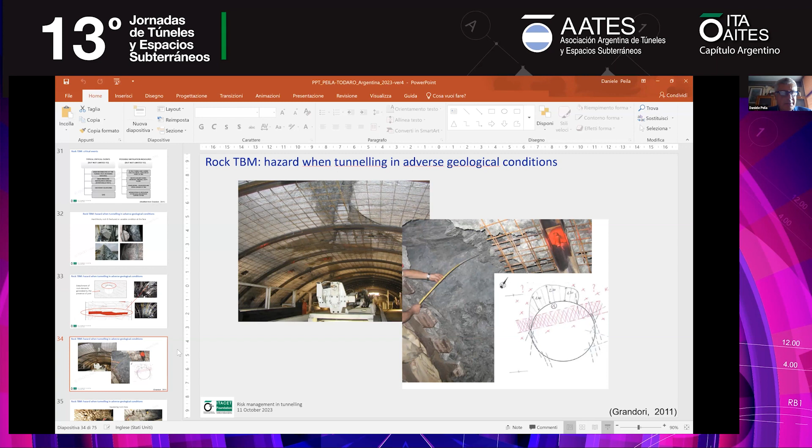Here we are, okay. I will lead the presentation, and then I will ask Carmine to say something, but I think that due to the time schedule, I will try to manage mainly the presentation.

I was asked to deliver a presentation collecting the main hazards that can be found when tunneling, in conventional and/or mechanized tunneling. This was the task that Michel Deffayet asked us to manage for this short course, and I tried to fit it into this schedule.

Starting with the presentation, I think it's important to have a clear overview of why understanding the risk of tunneling is so important. I think all people who work in tunneling engineering, when they approach design, do this, what I am telling you, and I will explain in a second. But sometimes this is not structurally organized.

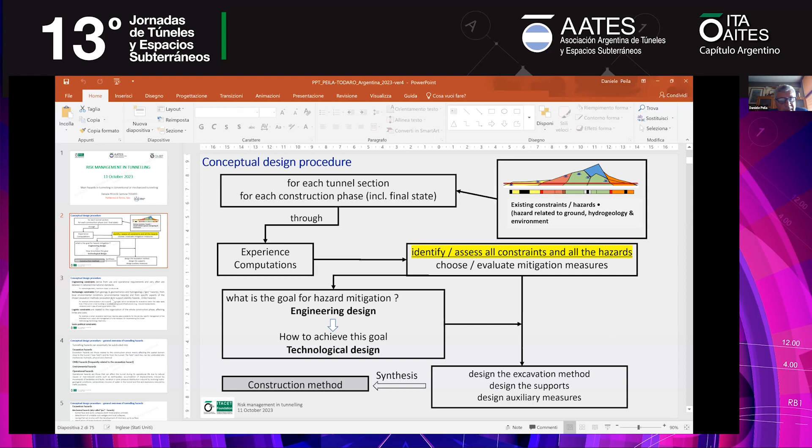Now, after this general scheme that I will try to explain better with an example, I will answer the question Michel asked me to discuss: what are the main constraints we face in conceptual design practice. There are engineering constraints that derive from use and operational requirements, often detailed and linked to national or international standards.

For example, the geometry of the tunnel related to its use, the maximum slope, and the curvature you can accept if you are in a road or a railway, including high-speed railway.

Then you have technological constraints that derive from the geology, geomechanics of the soil, and the hydrogeology of the underground water. I will give you some examples very soon. These can be globally called geo-constraints, linked to geology and geomechanical hazards.

Then there are environmental hazards that are constraints depending on local environmental conditions. There are also specific hazards related to the excavation method, excavation and support stability hazards, and operational health and safety, which are frequently underestimated or not considered in this process, but in my opinion are a key point to take into account.

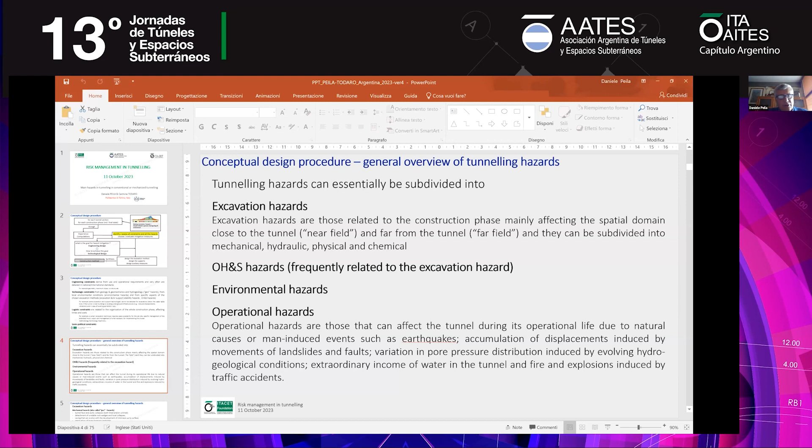I will not talk about operational hazards, which occur during the operation of the tunnel. In Italy right now this is becoming more and more important, related to the maintenance of tunnels and the movement that can occur in concrete linings, which can affect the safety of roads. But this is out of scope, so operational hazards are out of my presentation.

When we go to mechanical hazards, the geohazards, we can have tunnel face and cavity collapses, both lined or unlined, detachment of unstable rock wedges and potential local collapses, caving that can evolve with development of a chimney up to the surface, and reactivation of large dormant landslides.

Slope stability at the portals, rockfall, avalanches. Sometimes this aspect of slope and surface stability isn't considered part of tunnel design, but unfortunately in many big projects, the risk of rockfall and large landslides can affect job sites and tunnel entrances, and can require specific design. As tunnel engineers, our knowledge frequently isn't deep enough or doesn't give enough attention to this topic.

You can have unacceptable tunnel cavity displacement in squeezing ground. You can have karst—an example of karst was shown in the presentation before this session. Rock burst is a typical problem of very deep tunnels, like in the Alps or in the Andean zone, for example in Argentina.

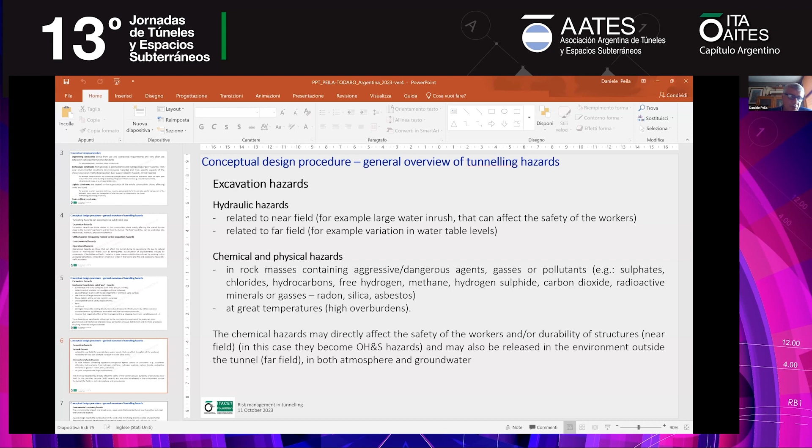This is also part of the environmental constraint, but the environmental constraints are also linked to architectural and landscape considerations, because now in Italy we are designing new highway tunnels and infrastructure closer to Genoa, in a very urbanized area, where landscaping conditions can be important. But water and air issues towards the population are again important - dust and the presence of ground contamination.

If you have to excavate a tunnel through a zone where there was historically some industrial infrastructure that could have polluted the soil - then there is the natural impact on biotopes, which can be very critical in mountainside areas, and correct natural resource management is also today, with the concept of sustainability of underground and global construction, becoming more and more important.

So this very wide overview leads to this slide. Due to all the risk and constraints, all the hazards that can lead to risk, a risk management approach should be developed. So when the risk level due to the hazard is not acceptable, you need to design a proper mitigation measure. And this is the key issue of the design.

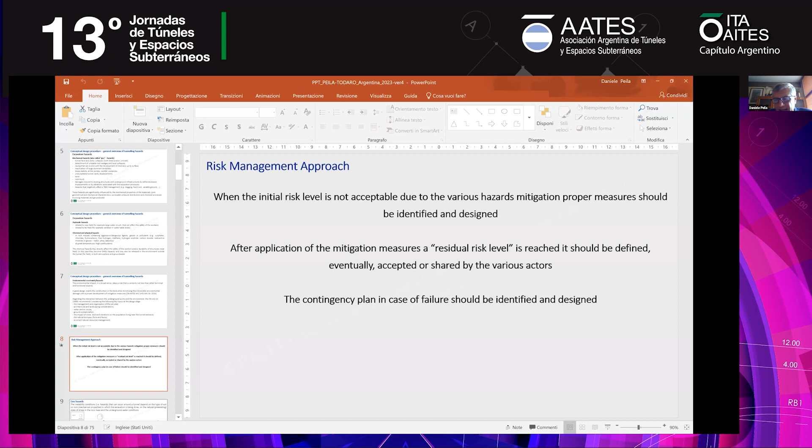So just to summarize the key concept of geohazard: the instability condition that can occur around the tunnel depends on the type of soil and rock, their mechanical properties in which the excavation is done, and the natural pre-existing state of stress. So it's not only the properties of the rock, but also the state of the stress.

It's clear that all these phenomena that can occur around the boundary of the tunnel can impact both the local stability, the safety of the worker, and the lining stability. In the case of boundary displacement, this can also affect surface stability.

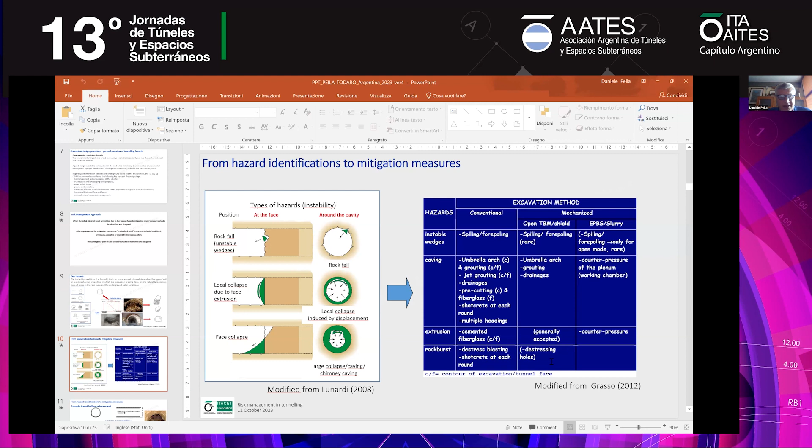Going back to a slide frequently shown in ITA presentations, taken from a presentation by Grasso some years ago but still active, you see that once you identify the hazard, you go to the choice of excavation method, conventional or mechanized, and the mitigation measure. I don't want to go into detail, just to show a general approach: from hazard, you go to mitigation measures. For example, we want to excavate a tunnel full face.

It's clear we are changing the situation, and there are new stability hazards that can occur. One example is instability of the footing of the steel arches. So you have a new engineering design: evaluate the type of footings and underpinning, and the technology is which type of foundation for the steel arch you will use. Also, you must take into account new operational health and safety issues, since there are more interfering workplaces, which increases the risk for the worker.

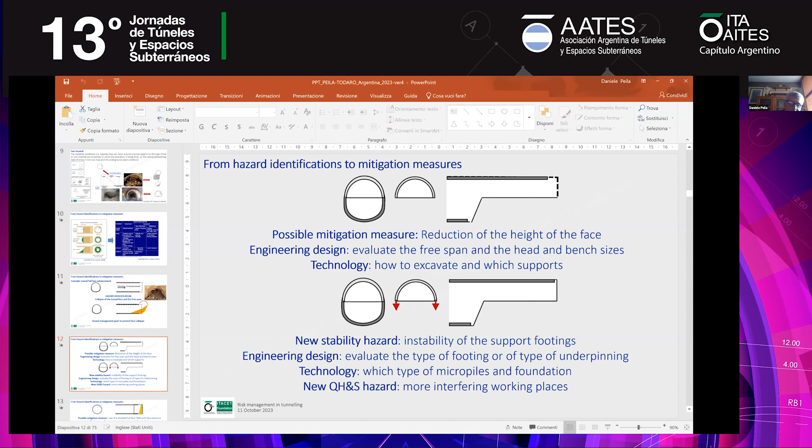Another choice, a possible mitigation measure, is to use a shielded full-face machine able to apply face pressure, which will prevent the collapse. So you have to evaluate the pressure to be applied. The technological choice, as I explained in my first slide, is to choose the proper type of machine.

Again, when you make a choice, you create a new hazard. For example, the new stability hazard is how to properly manage the face pressure with the machine. And the new technological hazard, if working with an EPB machine, is the management of the soil conditioning—should I choose the proper management of the soil conditioning? I have some slides discussing this concept.

There's also a new environmental hazard that depends on this technological choice: how should I dispose of the muck, for example, with the machine.

Another possibility, with the same type of hazard regarding management of the face, is to use auxiliary methods: drainage, pre-supports, jet grouting, permeation grouting, ground freezing, soil reinforcement. So I create a new type of material, press supported, and these can be done from the surface, from a nearby underground structure, or from the face. Again, the engineering design is to design this improvement—from where and to what extent—and the technology is the technology of this intervention.

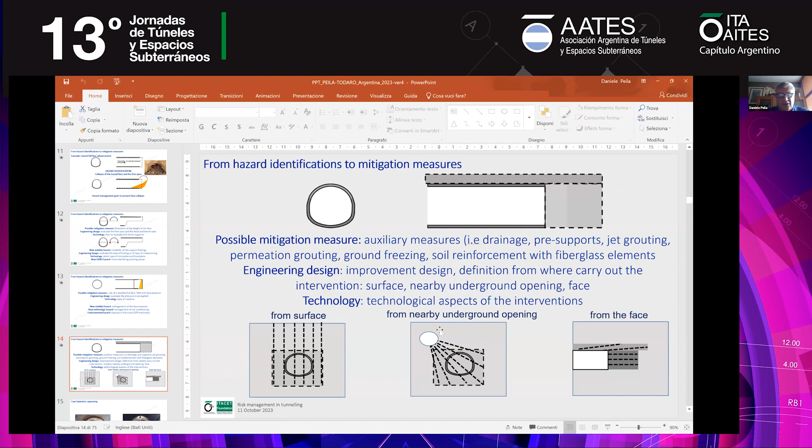For example, if I'm working in a tunnel where we're injecting sand that can't be injected everywhere, instead of permeation grouting you can use jet grouting or another method. But the concept I want to highlight in these methodological slides is that the engineering design is different from the technological design. I have collected some examples here.

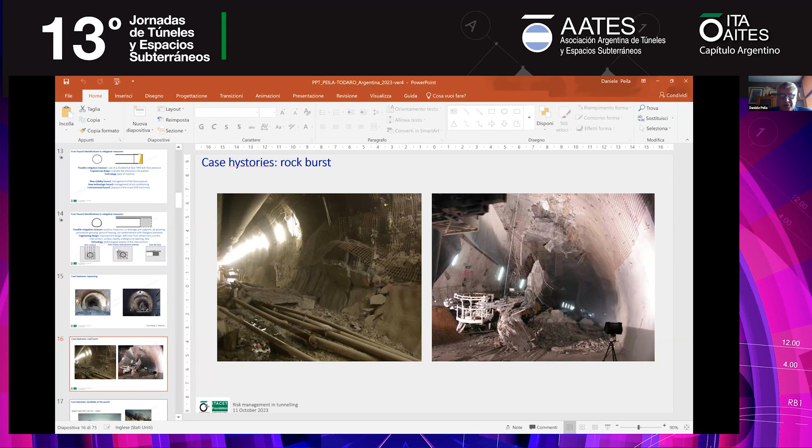But also some examples of what I was trying to explain: the risk of interference between surface instability and the tunnel.

This was a very old picture given by my mentor, Professor Pelizza, many years ago. It's a very old picture, but for me it's very pedagogical, showing the slide collapse that affected the portal entrance during construction. There was not a proper evaluation of the stability.

This is another example, sometimes underestimated in tunnel design, where you have a cliff. Here you see the cross section and the detachment of potential blocks that can affect a tunnel portal. The risk here is during construction, but also during the exercise of the tunnel. Here you see all the design we carried out with the wire mesh, like that one.

This is the numerical model of a mesh we carried out, and here you have the study of the proper positioning of the mesh to protect the exit of the tunnel, but also to protect the worker creating this artificial tunnel for the safety of traffic. So you have two concepts we take into account.

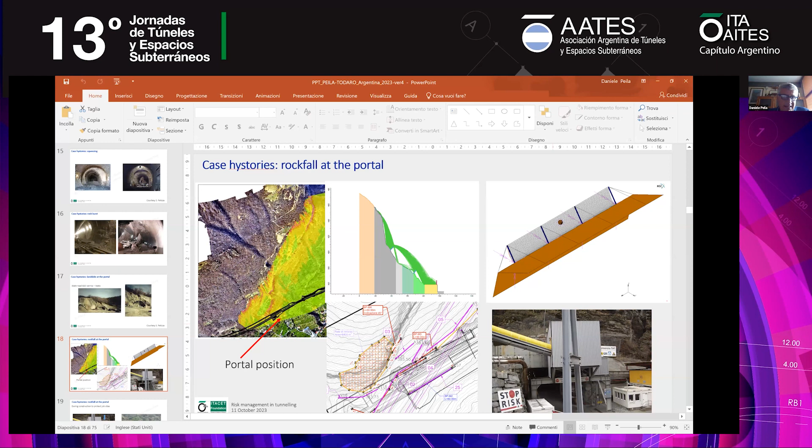In this picture you see the protection of the entrance of the tunnels, also with the wire mesh. Here you see the cliff, but this is another example of the protection of the job site due to the rockfall condition. So you have to protect our workers like that.

Water - here you have the example of a very heavy water income. Here you have an example of a sinkhole that was created during the excavation of the tunnel due to not proper face management. This was an excavation with an EPB, but the concept is that there was not proper face control, and you have a sinkhole reaching the surface.

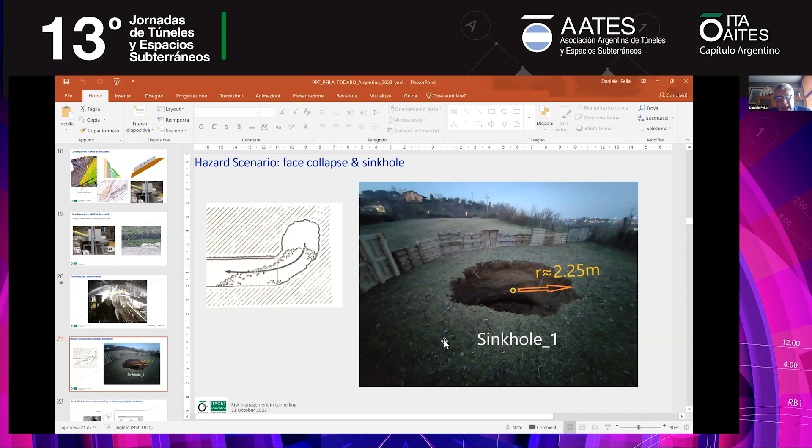When we think of hazard, it's also the stability and detachment of wedges due to the presence of joints. This is a typical picture of the geometry of the hazard, but this is an interesting example where you see that this tunnel was excavated originally with this size, with no large problem of stability. But when there was the enlargement of the excavation here for the parking zone along the tunnel...

...due to the exercise, the joints that occurred created a very wide possibility of detachment, and there was this collapse that was not occurring along the tunnel. The geometry of the joints was more or less the same, but it was the enlargement of the tunnel. Again, these slides were given to me by Professor Pelizza.

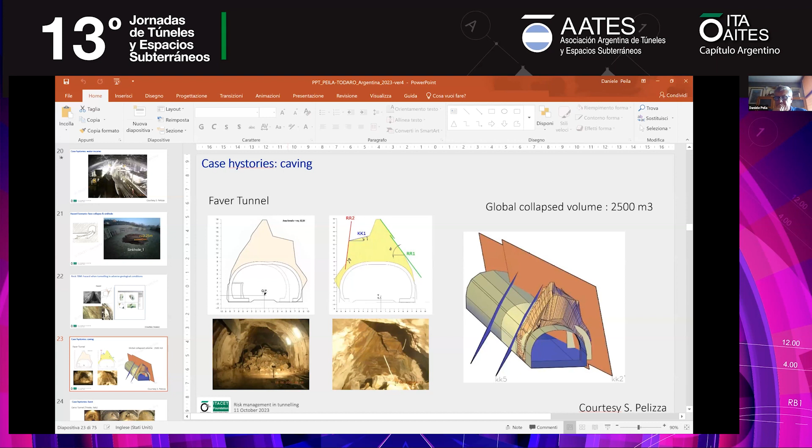I don't want to enter into the karst problem that was already discussed, but also the sudden rush of water that can completely flood the tunnel. This is an extreme example.

I want to give your attention to this example, the tunnel in Catania, in the metro of Catania, where you see the complexity and many hazards that can affect this excavation, because you have here a strong basalt due to a lava flow that was coming from the volcano, and here you have the sand that was deposited above the lava flow.

But the stability of these elements is completely different and requires different approaches to different hazards. But globally, they describe the hazard of this face, of this problem.

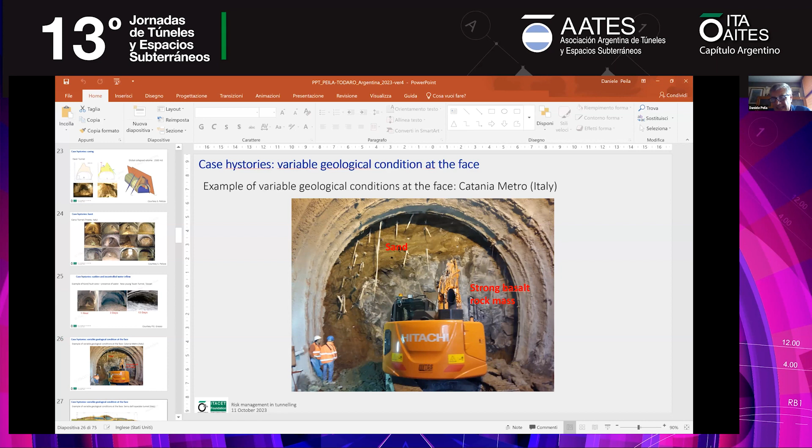This is another example in the south of Italy, where you have different layers of sand and clay, and these different types of layers present different hazards, because the clay is stable and the sand is not, so this slab of clay can detach or collapse. In this condition, there was a fatality that occurred.

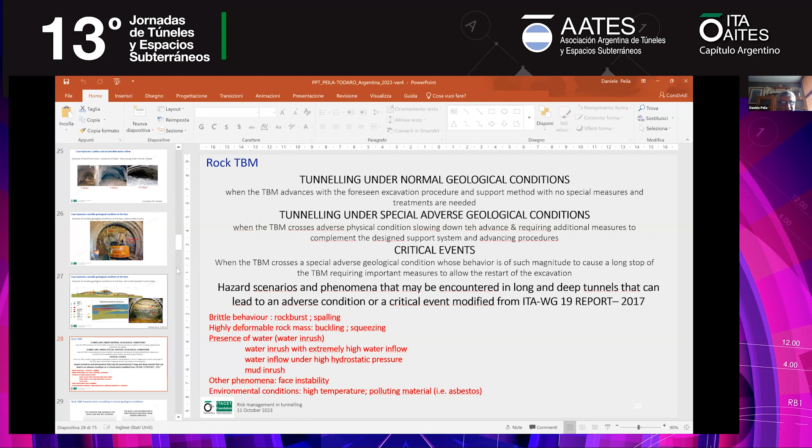Then there are the critical events that will block the machine and require important measures to allow the restart of the excavation. The hazard scenarios and phenomena that can be encountered in long and deep tunnels, leading to adverse conditions and critical events, you can find in an ITA Working Group 19 report, which is quite comprehensive and quite wide. These are all the schemes I have added in my presentation, and I will skip all of them, but you can find all these slides there.

Here, to show you some examples of critical cases, since I'm running out of time.

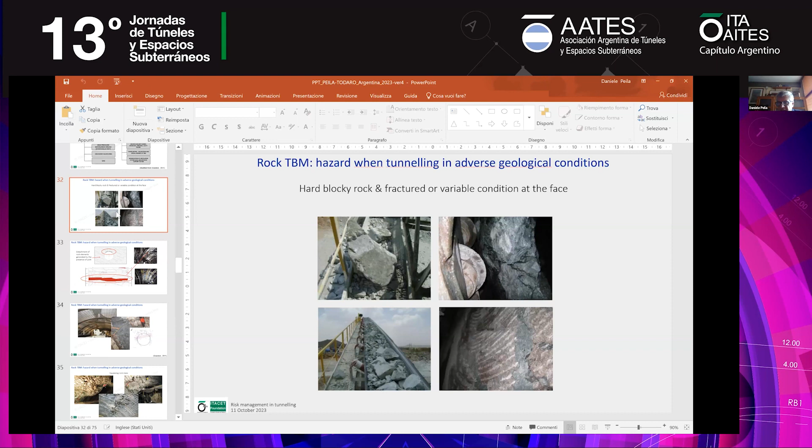In rock TBM, you can have hard blocky rock, fractured or variable condition at the face, which can affect the stability of the face, but mainly will affect the durability of the cutters, and so the cost of excavation. These are typical examples you can face.

Here you have again the same type of problem that occurred in conventional tunneling: the detachment of elements moving from the surface due to the presence of joints. Here is an example I personally studied, where this slab, not very big, was laying on the machine, causing a lot of safety problems for the workers.

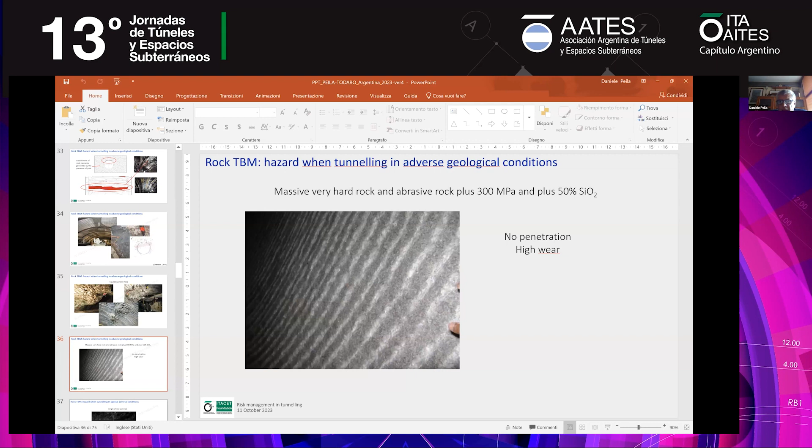I will jump all this part and move to the soil TBM. I will be very fast, no more than 5 minutes.

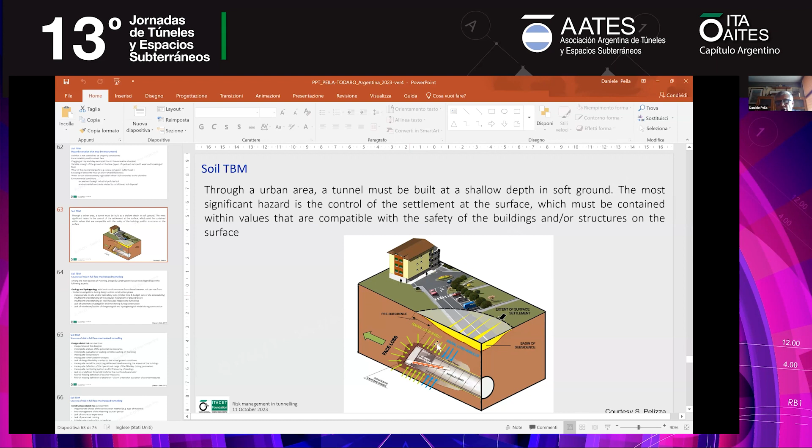A soil TBM, I always think, is a global machine that should take into account the surface and the underground. So you have a problem of stability of the face, a problem of movement of the soil along the shield, and the problem of correct backfilling behind the shield. This global system leads to subsidence and can affect urbanized areas.

The geological risk that can occur in this condition is that if you don't understand the interaction between the machine and the soil, you will have a lot of hazard. This is, in my opinion, the most critical concept to take into account. It's not proper understanding, because it is not the machine working and the soil answering to the work—it's together. If you don't understand globally the system made by the machine and the excavation technology, this will create a lot of hazard.

Particularly, and sometimes underestimated, are the critical aspects of the conditioning of the soil. Today, EPB machines are the most used machines all over the world. When excavating with this machine and you don't deliver a proper analysis of the conditioning, you can go to very large risk. So the hazard of improper soil conditioning in soil excavation is really dramatically high.

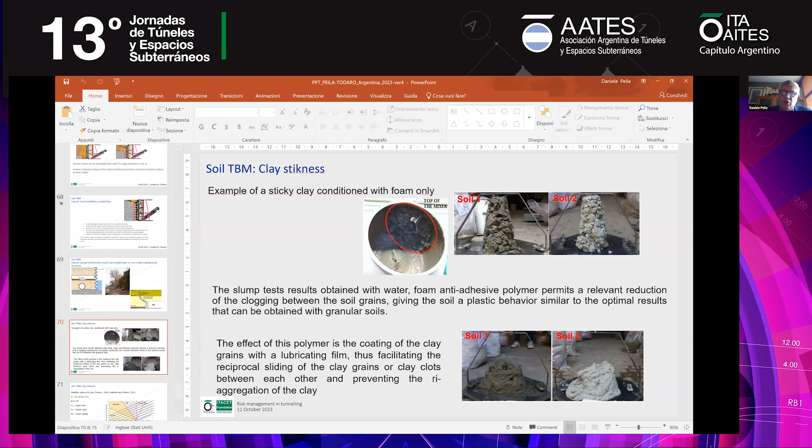So when you move to soil machines, the first concept is that it's not a single machine, but the soil plus the machine—you have to clearly understand the technology. I have to highlight that all the problems we found were due to improper management of soil conditioning. I have prepared a very wide presentation that you can read, with some more collected material. Thank you very much for your attention.

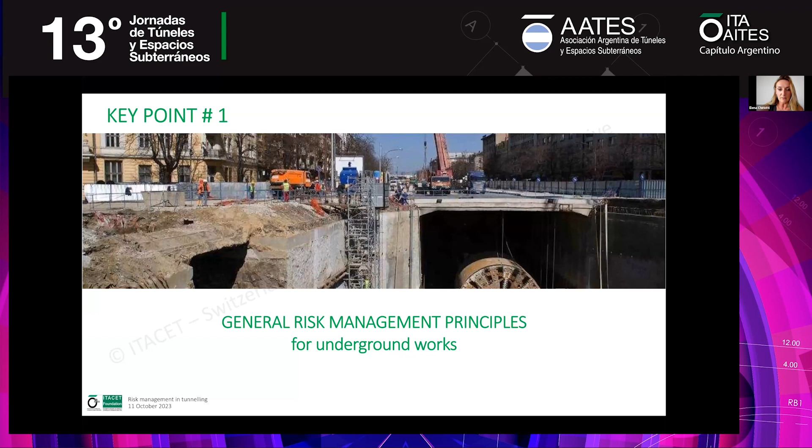I go directly to the theme of this presentation. I've organized it in four key points. In the first one, I would like to address the general principle of risk management for underground works. I hope everything I say is not at all new for you, because if this is the case, we can, as a worldwide organization of practitioners, say that risk management nowadays is part of our practice in underground projects.

First of all, a quick overview of what ITA, the International Tunnelling Association, has produced on risk management in the last years. There is a real ITA engagement towards risk management related issues, and this started in 2004 in working group number 2, which I now am animating, in which the principles of risk management are described, and all the process for identification, analysis, and communication of risks is addressed, and also responsibility of parties.

We are now reviewing in working group number 2 this publication and working on complements to that specific guideline. And then you may all know that in 2019 the FIDIC Emerald Book was presented, and this was a collaboration between FIDIC and ITA, a very successful collaboration in which the Yellow Book, the design and build Yellow Book of FIDIC, was readjusted to take into consideration specific facts related to underground works.

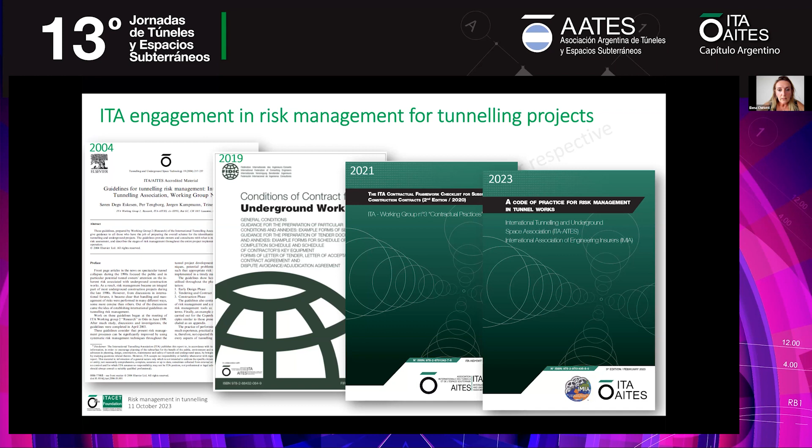Then in 2021, working group number 3 published the ITA Contractual Framework Checklist for Subsurface Construction Contracts. That, in spite of which form of contract is adopted, prepares and explains a list of fundamentals for the management of underground works, including risks. And in 2023 appeared the review of the Code of Practice for Risk Management in Tunnelling Works, a work prepared by the International Association of Engineering Insurers and ITA. So a real engagement of ITA in these activities related to risk management.

What the management of a tunnel project includes is managing different aspects strictly related to the management of risks. We know that underground works are affected by subsurface variability of ground and hydrogeological conditions, so control of this variability is strictly related to the quality of the site investigation and to the resources and time we allocate for that. We know we have to have a robust geo model — geotechnical, geological, hydrogeological — to help our capability to predict the expected behavior of the ground when the tunnel is excavated.

We know that the functionality of the design is strictly related to safety, and the two of them impact the layout, the alignment, the cross section, and the ancillary works. The construction methods are strictly related to the anticipated conditions and the constraints of space and geometry. There are issues related to access, logistics, environmental impact, cost, and planning, and in all of these, risk enters and has to be assessed.

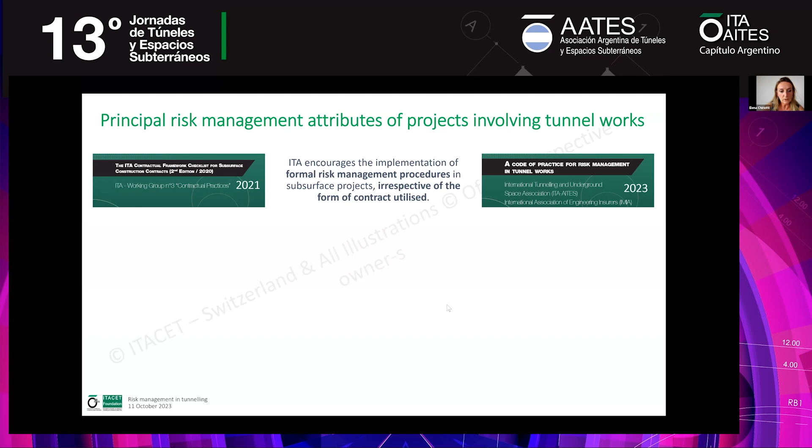ITA in general encourages the implementation of a formal risk management approach, independently of the form of contract adopted—whether it's an Emerald Book form of contract or another form. In any kind of project and contractual approach, there are principles that should be respected regarding underground works and risks.

First of all, it is up to the employer to initiate a risk management process for the project in the early phase. The formalization of risks should follow the preparation of a formal risk register in which the initial risk, the mitigation measures, and the residual risks are identified and then allocated to the parties.

There's also the recognition that risks are strictly related to costs and time, so these three items cannot be dealt with independently. They have to be integrated, and an integrated analysis of cost, time, and risks should be asked of the contractors, and should be prepared since the early phases by the designers.

Then there's the real belief of professionals that nowadays, for example with mechanized tunnels, different types of machines can more or less address the same kind of ground conditions. So ground condition is no longer the big barrier or differentiating aspect in choosing one machine or the other, because there's an almost overlapping domain of application of the machines. So actually, the devil is hidden in the details.

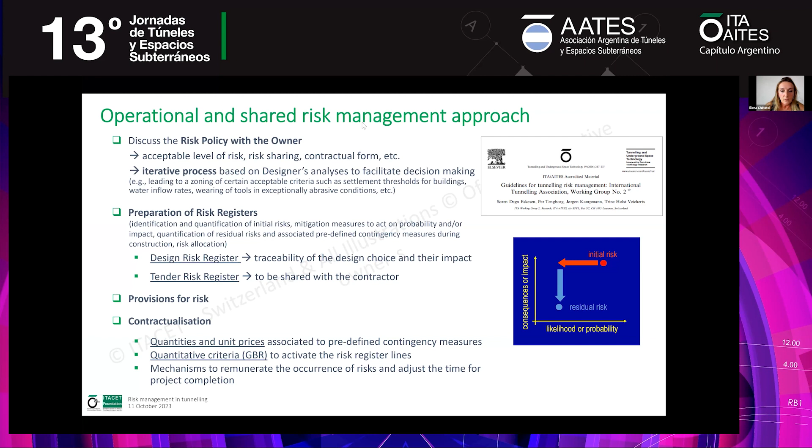So we want to arrive at a comprehensive risk register, as we see in the example on the top of the screen. But we also want the contractor, during the bidding phase, to be able to critically analyze this risk register and give his contribution and suggest amendments before the adjudication, so that the mechanisms for sharing risks are as clear as possible before the start of the work.

This will not reduce to zero the risk of claim, but will reduce significantly the risk of claim, and will allow a smoother construction period if the principles are applied correctly.

One aspect that has to be asked of the contractor is also to represent the impact of the risk on the duration of the contract and the project schedule. This can be done at least on the space-time schedule with regular updates, what in France we call a planning chemin de fer, and ideally by implementing a quantitative and probabilistic assessment of the risks, because risks clearly have an impact on cost and time that we can assess in a deterministic or probabilistic way in the best situations.

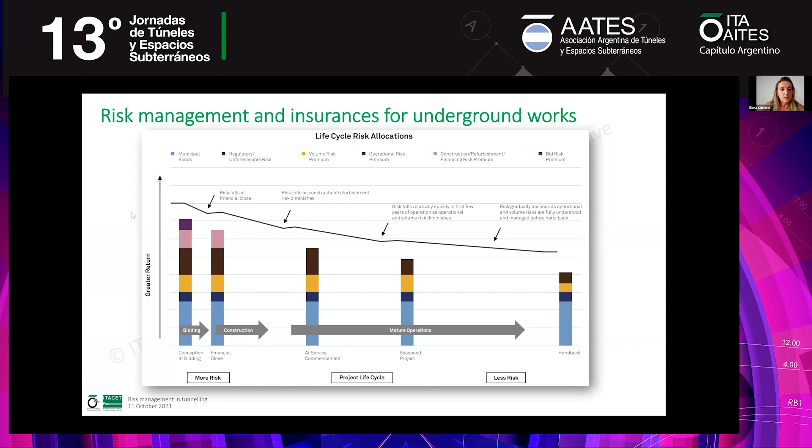And the sooner we do it, the better for the project, because the impact of risks and the occurrence of risks on the project time and schedule will increase with time if not dealt with properly. The opportunity to reduce risk that we have at the early stage of the project is very important, and we have to try to stay in this scheme: passing from bidding to construction to operation, our risks are reducing.

Then passing from this to the second key point. The second key point relates to investigations - from the investigation to design and construction, the heart of the design and construction process. I will not enter into the details, but just go ahead with these general principles that have to appear in our risk management approach - key points that I would like to stress.

The importance of a staged design. A staged design makes it possible for the owner to take decisions that are technically supported, supported by a number of analyses that are sufficient for the owner to take the proper decision, the best decision at that time for the project. So a staged design means also staged investigations available at this stage.

This seems like an obvious statement, but it is not so obvious, because, for example, in the last year, in the region of Paris, we have seen a huge increase of underground works, extensions of metros, extensions of regional railway lines, the Grand Paris Express. All of these works at once put the world of site investigation in crisis.

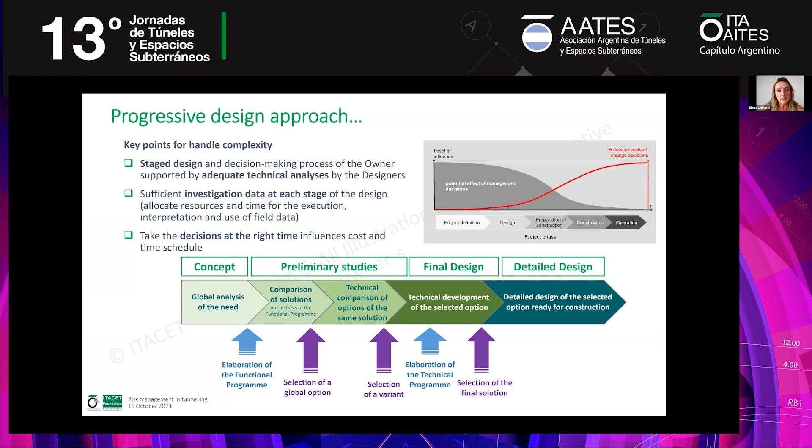If we want to manage the risks, investigations have to be ready at the right time to take the decision at the right time. So when I speak about investigation, I speak about everything that goes from the geotechnical and geological data to hydrogeology, hydrological data, topographical data, meteorological data, environmental data.

In the publication we made a few years ago in 2015 with working group number 2, about the strategy for site investigation and tunneling projects, we stressed the importance of having a proper amount of site investigations. We did a statistical analysis of international projects, which led us to say that less than 1% investment in site investigation at the preliminary design stage is generally considered risky. A good rate for a normal project is about 3% at this stage.

Of course, this 3% can increase a lot, much more than this, when we deal with huge projects like Transalpine tunnels, 50 kilometers of tunnels, in which during the investigation phase we have to excavate experimental adits, experimental shafts, and so on. So this is just a graph to show the relevance of site investigation in our projects.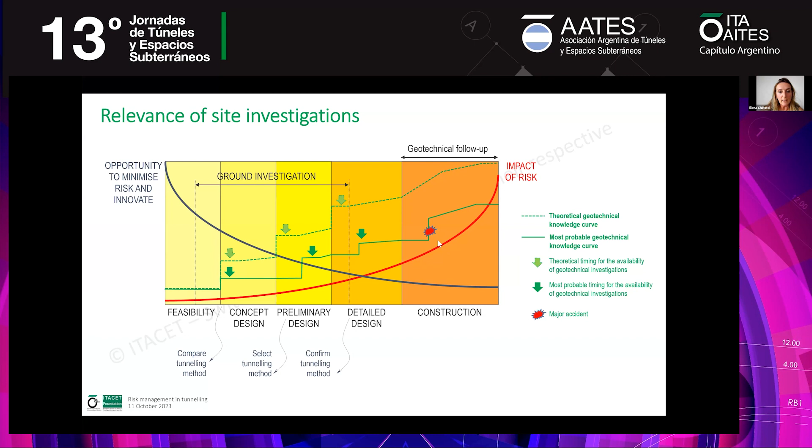What we do not want to happen is that starting from the preliminary detailed design, the results of site investigation are taken into account too late. When they are taken into account too late, your geotechnical knowledge of the project will not reach the level where it should be, and this can lead to major accidents. This is something we do not want.

So what we want is a good ground model with proper geotechnical interpretation. The model not only has to be complete, but has to be communicated in the proper way, and has to include all the parameters that influence the construction method.

We have many tools nowadays: 3D tools, or the classical mock-up along the tunnel project, the tunnel alignment, which is still a very good tool, especially if we are able to connect the ground parameters to the risks and visually explain to all parties of the project where the risks are, what type, and what could be their impact.

The importance of construction method, Professor Peila addressed that. Tunneling is not a risk-free exercise, and the proper construction method is one of the key elements to properly manage underground works.

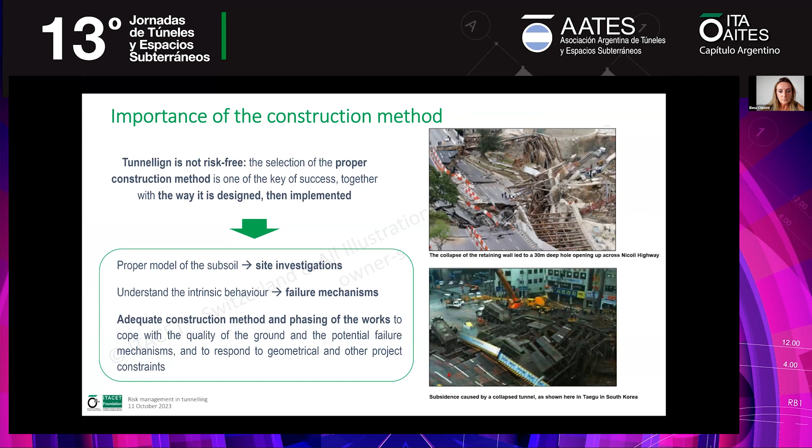The adequate construction method will come from this understanding. And then, of course, everybody knows about the two groups of construction methods that we can use: mechanized methods and conventional methods.

We know the advantages, I will not go into that field, but the choice of the machine, the type of machine, is not sufficient alone.

EPB, TBM, slurry, mix shield, dual mode machine. We will select the one that offers, for the particular project, the best control of pressure losses, face stability, and the best control of induced settlement if we are in an urban environment.

But then there are all the aspects related to the appropriate design of the cutter head, the power, the maximum face pressure, the conditioning for the EPB, the job site and logistics for a mixed shield or a dual mode. Once the design of the machine has been properly done, there is still something to say and something to share among the parties.

We really believe that what has to be done is that steering parameters have to be chosen. It can be the face pressure, the thrust force, the injection pressure, the weight of the extracted material, the density, or whatever parameters. But it's important that these parameters are identified as steering parameters, and on these parameters, thresholds are defined.

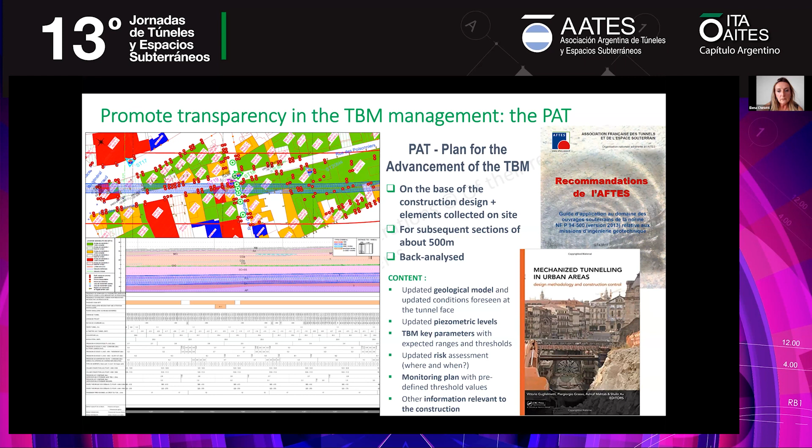And this is exactly what we want to do. So now the use of the plan of the advancement of the TBM is contractually included in the majority of projects in France.

Construction method: in case of conventional methods, the approach should be similar, and in order again to control the risks related to these construction methods - choice of not only the proper method, full face or partialized sections, not only the design of face stability, the analysis of stand-up time and the advance cycle, the definition of primary support, control of groundwater, installation of the final lining type and when to install it - but also defining steering parameters on which we can define thresholds, and control the behavior and response of the ground when excavating.

Extrusion, convergence, plastic radius, pressure in the support, groundwater pressure, settlement, whatever - but define parameters in order to pilot, to steer the construction of the tunnel.

Implement a flexible design. All of us recognize this as a set of primary support sections associated to a tunnel project, along the tunnel longitudinal profile, with a zoning for these. For each of these support sections, a zoning that is predefined at the design stage. Very important to associate to this zoning an applicability criteria.

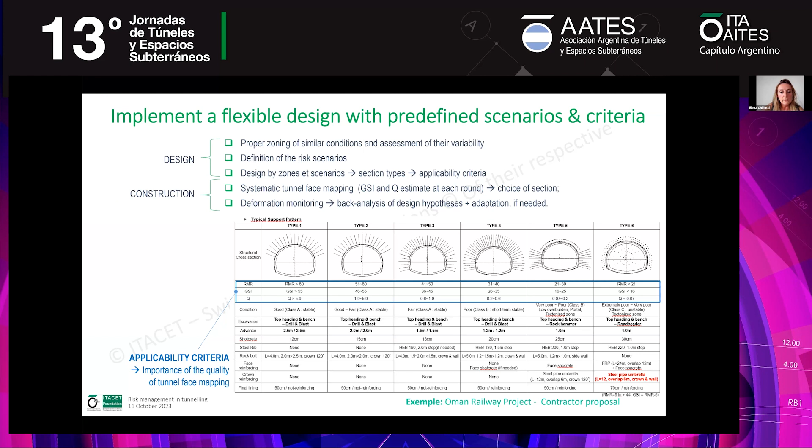So to have criteria to go at the tunnel face, recognize the quality of the ground or the rock mass, and decide what section should be applied. But not only that - we can go further. We can make this support section...

...slightly variable. So each of them, instead of being a set of fixed shotcrete thickness, number of bolts, length of bolts, can include a slight variability of these types of support, so that the support section can be easily adapted on site. We have all the possibilities of ground support already pre-analyzed, predefined, and associated to applicability criteria, so that on site we know whether to apply the ordinary support section or the heavier or lighter support section according to clear criteria.

As much as we can do that, the more we will be able to manage our risk during construction.

So, sorry Elena, we have to round up the presentation. Yeah, so please, just...

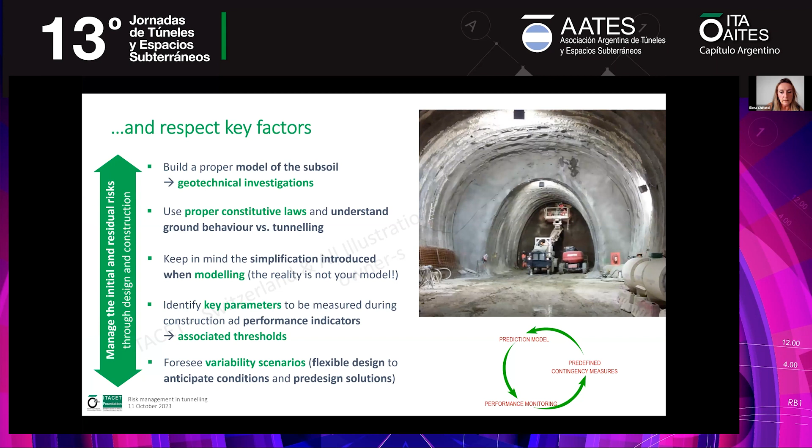Yes, everything - all of this has to be seen in an observational approach, in which monitoring plays an important role, if possible controlling everything on a unique platform: the TBM, the ground, the buildings.

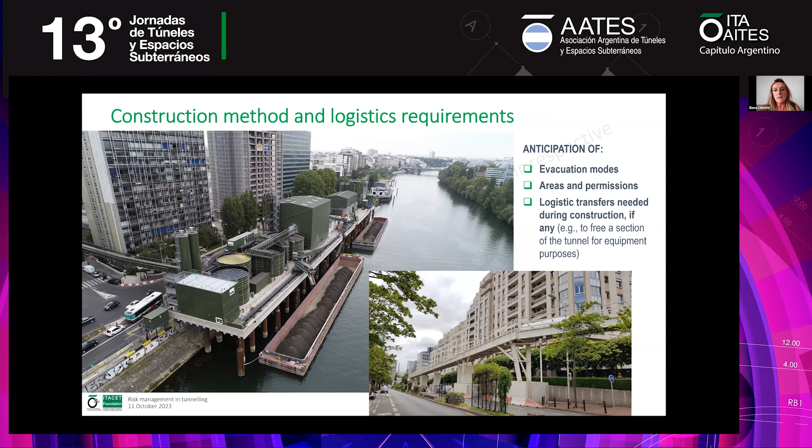So we have this tool nowadays. And then I was just finishing on the importance of logistics, but maybe we can discuss this in some questions you may have. Otherwise, you have at your disposal all the presentation on site logistics, and then the impact of risks on cost and delays.

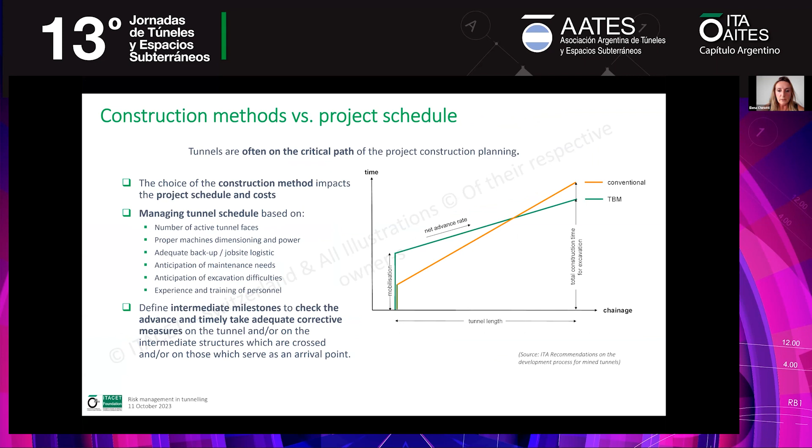I don't know if there are any special questions. Okay Elena, thank you very much. Yes, let us see if there are questions.

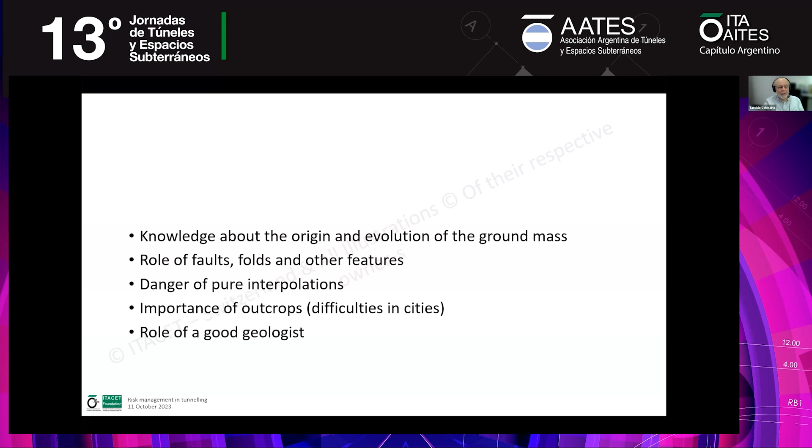The role of faults, folds, and other features — it's a danger to do pure interpolations. This is the last thing that one should do: just do boreholes and interpolate information in between. The importance of outcrops, which in urban areas is sometimes very difficult to find unless you are in some peculiar cities like Rio de Janeiro, which is not usual. And finally, the role of a good geologist, as I mentioned in the beginning.

These are examples of problems that we would face if we don't have a proper geological model. This is a dike — let me put the pointer.

A diabase dike, very common here in Brazil and in many other locations. If you just have a borehole here, a borehole there, and in the middle what is good rock, you find this. So many problems I've been involved with in tunneling relate to dikes like this in Precambrian rock in Brazil. These folds, this is an example from the UK.

If you don't have a clear idea about the model, interpretation can be meaningless with so many folds. Core stones, definition of the top of the rock mass is sometimes a mistake we make by reaching a core stone and thinking it's the top of the rock mass. This has led to situations where designs are made for tunneling rock, and you get there, and it's not rock. It's just this type of ground mass.

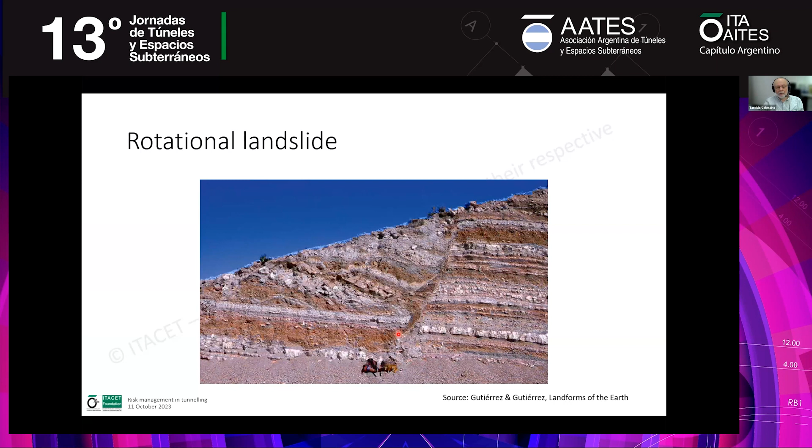Or rotational landslides or faults in which we see that the continuity of layers, of horizontal layers, is broken. All of this must be part of the model that a good geologist would use for interpretation. Spheroidal weathering is also a big problem for definition of the top of the rock mass, and this type of rock mass would be much more problematic than could be anticipated with just a few boreholes and a wrong geological model.

Sources and types of geological uncertainty. Geological uncertainties can be of two types: aleatory and epistemic. The aleatory is actually intrinsic to the rock mass, the ground mass in general. There are spatial variations, for example joint strength, degree of weathering, and temporal variations like the groundwater level, and these are intrinsic to the rock mass. The more we investigate, we cannot decrease this, because it is actually a property of the ground mass itself.

On the other hand, we have epistemic uncertainty, and this one we can handle better, because there are three types of epistemic uncertainty. Site characterization, for example sampling—the sampling process can be improved to get a better understanding of the ground mass. The model, for example a strength criterion or a geological model, as I showed in the previous slides. We can be interpreting with a wrong strength criterion, which is not adequate for the ground mass, and this is a typical problem that can be solved, but one of epistemic character.

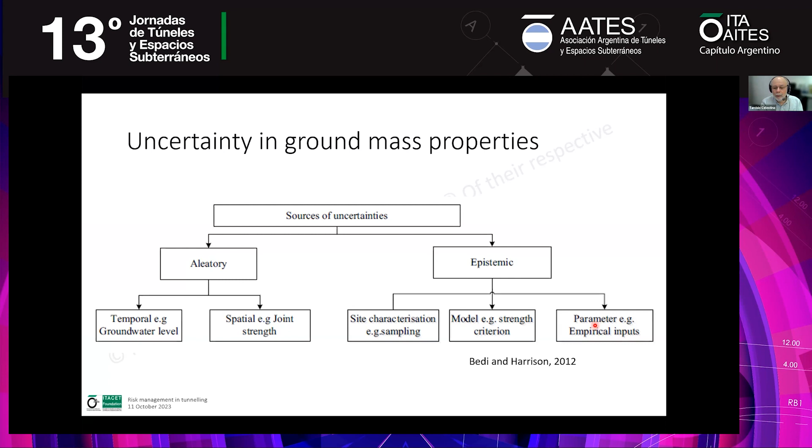Parameters, for example empirical inputs for a strength parameter, can lead us to mistakes if we don't take the proper source of information. Aleatory uncertainty, as I said, is the natural randomness of the geological process of formation, and we cannot do anything to decrease that. They are temporal and spatial variations. They cannot be eliminated or reduced, even with more investigation.

Aleatory uncertainty can be characterized by stochastic models and handled with probabilistic theory. On the other hand, epistemic uncertainty includes statistical uncertainty—limited information such as number of available samples—and if we increase the number of samples, we can decrease the epistemic uncertainty. There's also measurement uncertainty: if we are using inaccurate instruments, we can improve by using adequate instruments, or by using a proper geological model that can decrease the uncertainty. So epistemic uncertainty can be reduced or even eliminated with more information, and it can be handled not with probabilistic models, but with fuzzy logic.

Quantitative consequences. People have collected information like this one proposed by Pelizza: what happened in projects after we know that only about 0.5% of the cost of the project was spent on investigation, when Elena mentioned this number should be about 3%. See the consequences when someone uses only 0.5% on investigation—there are compiled examples, not theoretical, of the cost of the work increasing all the way up to 80%. Of course, the more investigation we have, the lower the scatter in these final costs.

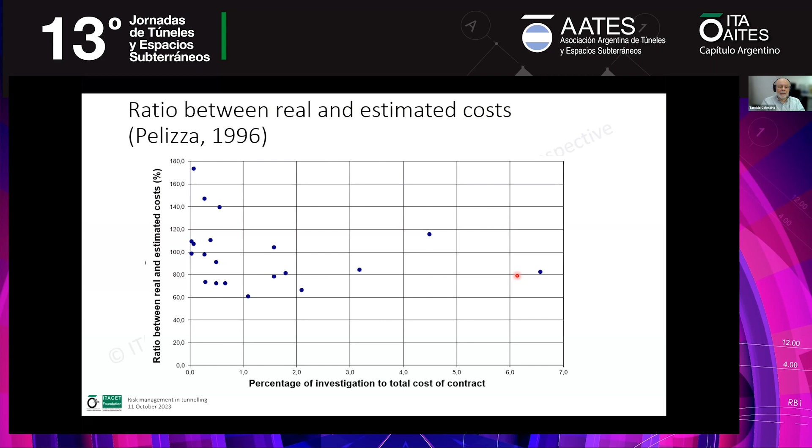Harvey Parker brought us very nice suggestions. It's no longer sufficient to describe stratigraphy and groundwater table—we have to go all the way to predict the expected behavior of the rock mass. We must also establish baseline numbers of the properties so that changed conditions, if encountered, can be administered fairly.

Elena Chiriotti has just talked a lot about the contractual consequences of dealing with uncertainty, so I don't have to go further into that. In 1984, the US National Committee on Tunneling Technology produced a very nice recommendation about investigation.

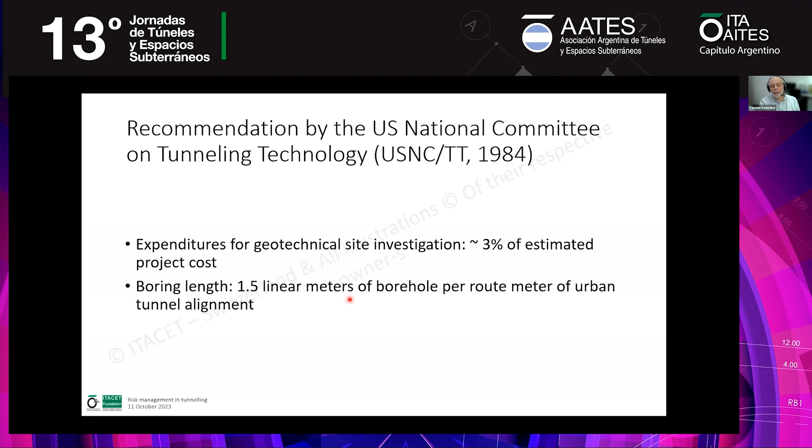They said very clearly that expenditures in geotechnical investigations should be about 3% of estimated cost of the project, as Elena mentioned. And the boring length should be 1.5 linear meters of borehole per meter of urban tunnel. In other words, for a 1,000 meter tunnel in an urban area, we should have 1,500 meters of boreholes, which is not enough, I would say, because this leads to only 0.001% of volume of material that would be sampled.

Whereas if we go to other disciplines in civil engineering, for example concrete, I took the Brazilian standard for sprayed concrete, and we should test 0.12% of the total concrete, which is an industrialized material. Dealing with natural material, we are happy with seeing only 0.001%. So people in concrete test 100 times more than what we are happy to sample. This is very little. The recommendations by the US National Committee on Tunneling Technology should be revised, and it should increase to have more investigation.

Excavation safety and geotechnical uncertainty - how to deal with that? Probabilistic assessment of safety. To illustrate this, I'm bringing you a real example of a tunnel in the city of Campinas, very close to where I am in São Paulo. This tunnel was excavated by top heading and bench, but when only the top heading was excavated, without a temporary invert.

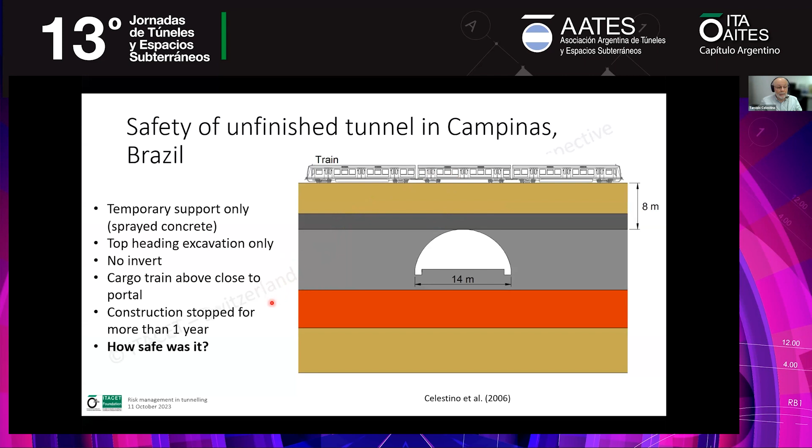How am I going to answer that with a number, factor of safety 2.5? Can you wait for 100 years for this work to be completed? No, I didn't do that. I did a probabilistic evaluation of safety. There was this train on top, the construction was stopped for about 1 year, and the question was: how safe is it?

Unfinished tunnel, top heading shell only. Two failure modes were analyzed: failure of the shotcrete shell, and failure of the footings supporting the shotcrete shell. Evaluation of failure probability: we could quantify the variability of the soil strength, cohesion, and friction angle, published in the literature for what the uncertainty for that type of soil was.

And for the shotcrete, we investigated, and we could have the variability of the thickness and of the uniaxial compressive strength. We ran a 3D finite element model with a load train here on top, with the values from the Brazilian code for the load train. And these are the parameters for the soil.

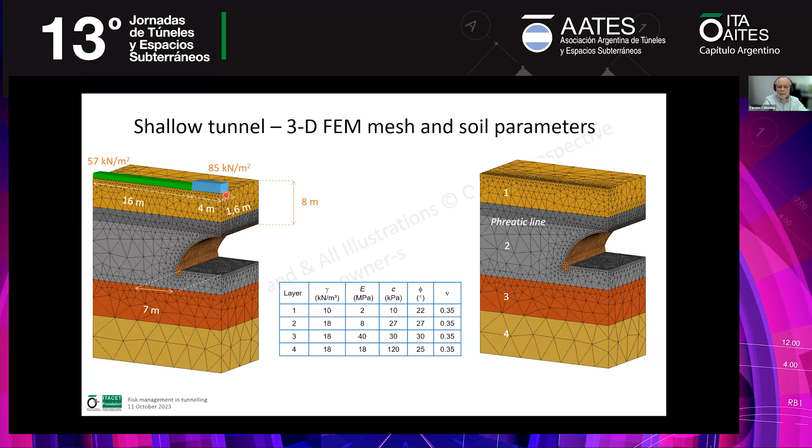We adopted the load resistance factor design. We know that both load and resistance follow approximately normal distributions. What we call factor of safety is simply the ratio between the average of those two distributions. The reliability index is given as a function of average results and standard deviations of the two probabilities. We can also define the margin of safety, which is the difference between resistance and load effects. In this distribution, we call this function Z.

The area below 0 is exactly the probability of failure, and the reliability index is given by this expression, in which we can put the factor of safety with very simple algebraic manipulation. From the results of that 3D analysis, we had distributions of axial forces and bending moments. And for resistance, histograms of shotcrete, we had this distribution of thickness.

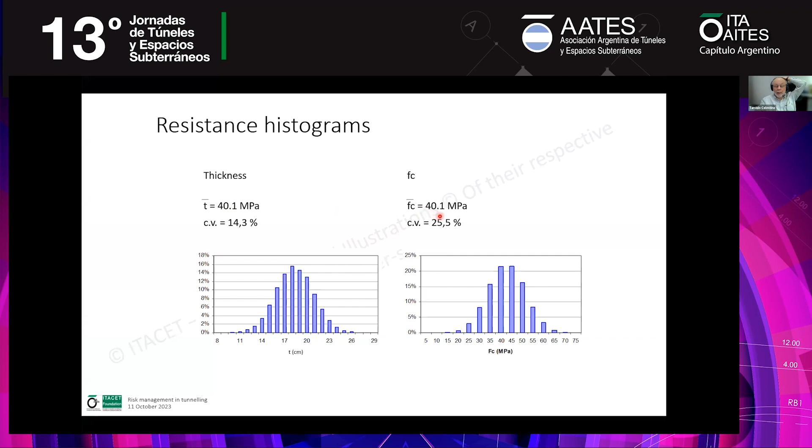Sorry, there is a mistake here. The average thickness is 17.5 centimeters approximately - this is wrong, not 40.1 megapascal. I'm going to correct this and send this PDF to you. The distribution of strength is given here, with average and coefficient of variation.

So we could run Monte Carlo simulation of thrust interaction diagrams, knowing the pairs of values of bending moments and normal force. We ran Monte Carlo simulation of the moment-thrust interaction diagrams to come up with the conclusion that the probability of failure of the arch was very low, actually 1 to 32,000. But on the other hand, for the probability of failure of the footing, we found the factor of safety by strength reduction factor and by the expression correlating factor of safety with reliability index. We came to a lower result of probability of failure of 1 to 3,400 for this mode of failure.

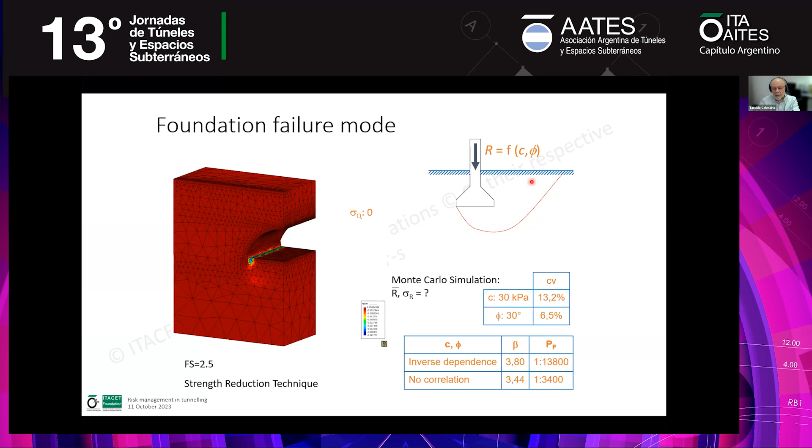But this is a nice way of dealing with uncertainty rather than just assigning a factor of safety if we have a large scatter of strength.

Spatial variability, concepts of geostatistics. The time is very limited, but I can show you briefly how we deal with spatial variability.

The main concept of geostatistics is based on the variogram, which is actually the evolution of the variance between observations separated by a distance h. The variance increases the farther away we have the samples, and this law of variation of the variance with distance between samples is this function, the so-called variogram, in which we have parameters like the range, after which there is no more influence of the distance.

We have just laws of regular statistics, no longer geostatistics. This distance is the so-called range or amplitude. And here we have a kind of intercept, which is the so-called nugget effect.

In other words, properties can vary in very short distance, because geostatistics comes from mining engineering. We know that the grades of the ore can vary very drastically in short distances, and it increases.

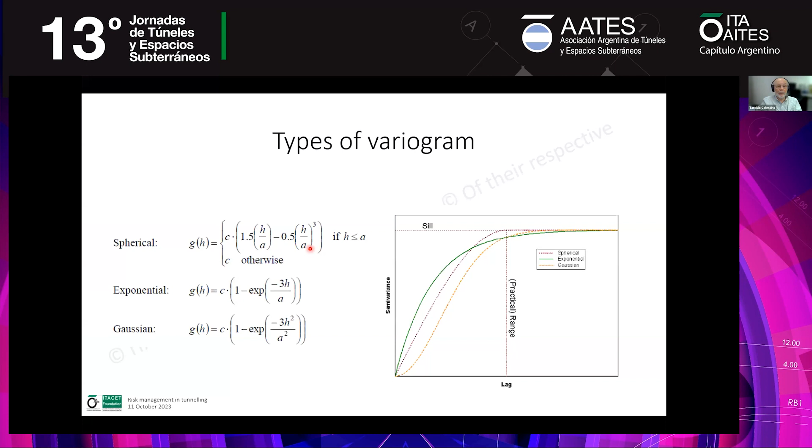There are different functions for variograms. They are shown here. The most used is this spherical variogram. The example which I'm going to show you uses this expression.

There can be anisotropy, of course. The variability can be larger in one direction than in other, and we can deal with this anisotropy by having different variograms in different directions.

By knowing the variogram, then we can run ordinary kriging for spatial interpolation of properties, or even for error estimate. We want to know what's the error for our estimation of, for example, standard penetration test in ground mass.

And this can be very useful for the optimization of additional investigation, because knowing the error, we can just plan our next investigation where the error is largest, not where the distance between boreholes is largest. The error may not be that high there, but we can plan the next borehole exactly where the error is maximum.

In this ordinary kriging, we just do this interpolation in such a way that where we have information, the variance is 0, the coefficient of variation is 0, and the uncertainty, of course, is large between the points of investigation.

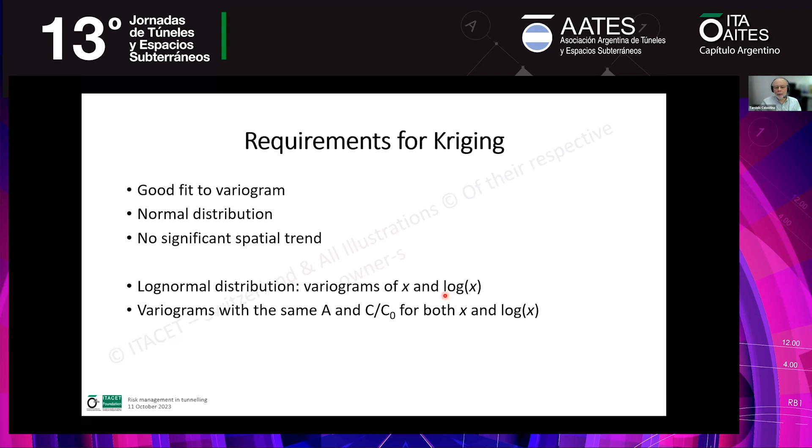Sometimes we have variables with log normal distributions. In those cases, we should have the variogram of x and log x. When we have logarithm of x, then we have a normal distribution, and we can prepare our variogram. This is a real example I bring to you, of a research work which I supervised

for underground works planning in the city of Curitiba in Brazil. So here, for example, we have one property, one variable, which is the depth of tertiary sediments. Tertiary sediments there are very competent for tunneling.

So this is a variogram for the depth, which is not a normal distribution. Then we took the log, and now we have a normal distribution, and we can have the variogram. And there was anisotropy in different directions, as we can see here.

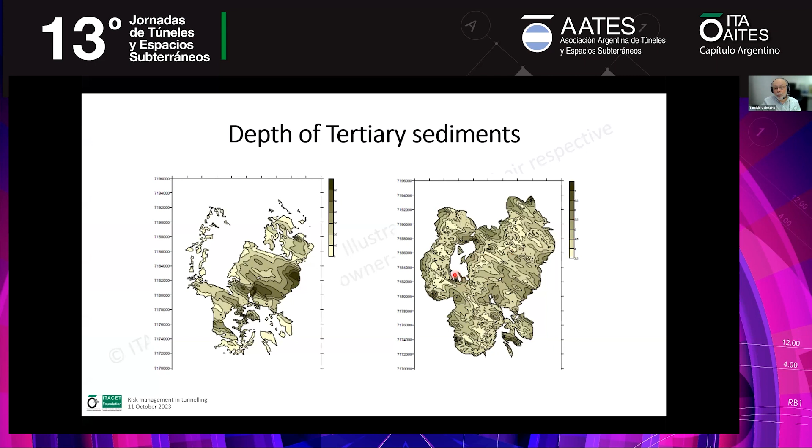And now we can have estimates, for example, depth of tertiary sediments. The scale is not so clear here, but we have 20, 30, 40 meters depth. So this is our prediction based on geostatistics, and this is the prediction of the errors. If we want to refine, we can just do our next borehole where the errors are larger.

Estimates for NSPT at 14-meter depth. Here we have the value of NSPT, and here we have the error. So also a very good guide to plan our next investigation.

And based on NSPT, this planning work actually went a little bit farther, correlating NSPT with face pressure required for a TBM to have stability during excavation of the tunnel. So the use of geostatistics was very providential for this prediction of variability of properties along the space.

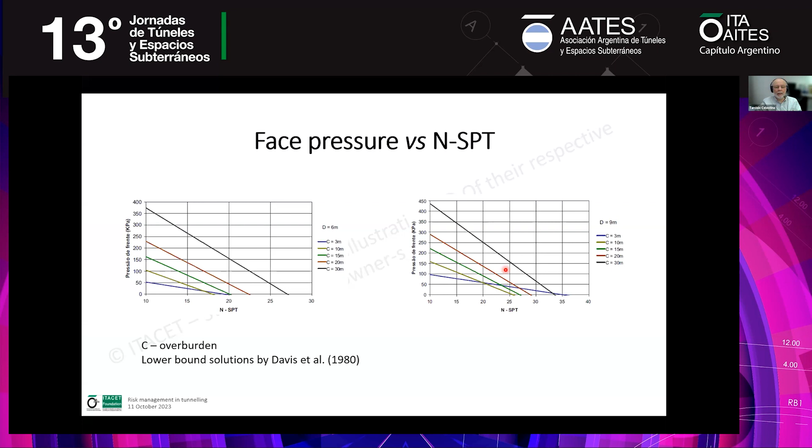Concluding remarks: we have seen that epistemic uncertainty can decrease with good investigation, and this is our role, to identify where the errors are and where we should invest in improvements. Aleatory uncertainty, we cannot decrease it. It's an intrinsic property of the ground mass.

So to deal with that, probabilistic methods for safety evaluation are very handy, and I showed you an example of that. Spatial variation, the role of geostatistics for this, I showed this work for planning of underground works for the city of Curitiba with geostatistics, and interpolation, which was done with kriging, which is a very good guide for optimization of new investigation.

So I will talk about contractual system and cost mastering for underground works. After a little introduction, I will talk about owner responsibilities and a bit largely about project management, and then going through different contractual practices.

I will talk about general contractual practices, and then I will go through underground works specificities. I will try to explain why it was really important to publish the new Emerald book that Elena talked about previously, and we will see what is the added value of this type of contract compared to other more general types of contracts.

Just as an introduction, bear in mind that the objective of the different stakeholders, mainly the objective of the employer, is basically how to build good projects, to build an infrastructure of good quality with a reasonable cost and delay. So this is the goal of how to make your contract, is how to achieve this goal.

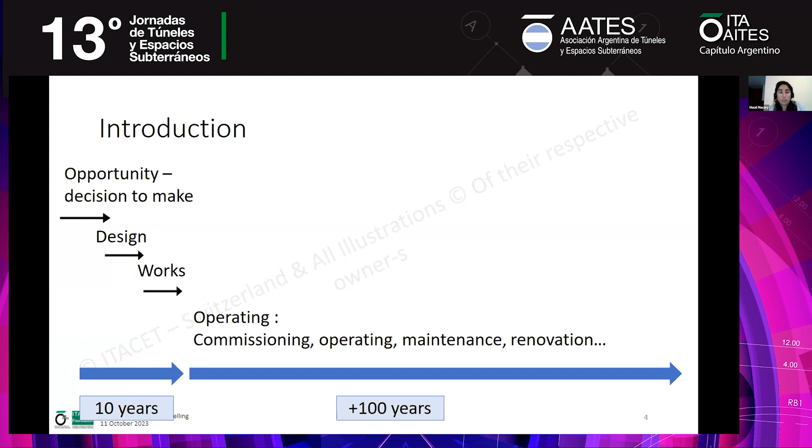Well, that's just for you, so we use the same words. Then I wanted to talk a bit more largely about project management, and especially to underline the owner's responsibility, because before choosing the type of contract and going further in the project, the owner has a lot of actions to implement.

First of all, you need to verify the feasibility of the project. What do we have in mind when we talk about feasibility? First of all, it is really important that the owner defines the objectives of the project and also specifies the owner's requirements. Then when talking about feasibility, for sure we're talking about technical feasibility, but it is also really important to talk about financial feasibility.

For that, we need to have a budget, and it is one of the objectives to respect the budget. The last point of the owner's responsibility is to decide the scheme of procurement, and especially which type of contract is adapted to implement. So I'll go a bit further on these different elements.

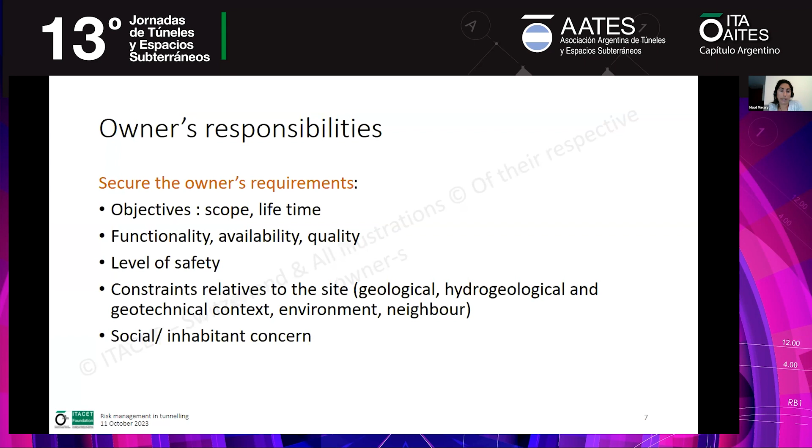Regarding the budget, this is definitely the owner's responsibility. They need to define the cost of investment, but also the life cycle cost. Depending on how it is operating, they might get some operation revenue, and then are able to calculate the estimated return on investment, which usually depends on the date of commissioning.

So let's talk a bit about the cost of investment. Usually what we include in the cost of investment is all the cost of design - how much you paid your engineer to do the design, and also all the ground investigation. Professor Celestino talked before about ground investigation, which is really important, and it is really important to set a budget for that.

You may also have the land cost if you need to buy land for your project. Then we have what we call the reference cost of the work, which for methodical purposes is usually divided into 3 parts. First, you have the technical estimation of the construction cost, which should be reasonably conservative. Then you usually have an allowance to cover inaccuracies. And then you have a provision for identified risks.

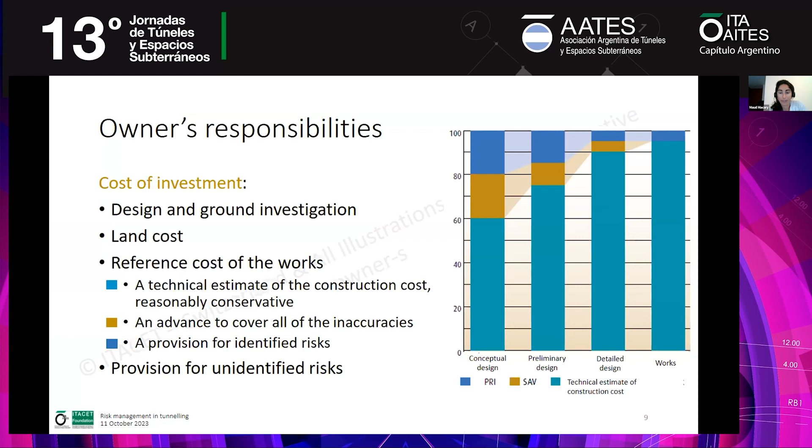The last point of the owner's responsibility is finally to decide the scheme of procurement and operation. So we are here in the phase of the project where all the definition and preliminary design has been done, and then the question is what type of contract for the work do you want to choose? I will show you the largely used different types of contracts.

There are different types of contracts depending on the number of partners the employer wants to work with, the level of direct influence the owner wants to have on the construction activities, and the risk capability of the owner's organization. I will show you the different types of contracts, and at the end we will go back to the risk and how to choose which type of contract is adapted depending on the level of risk you have on your project.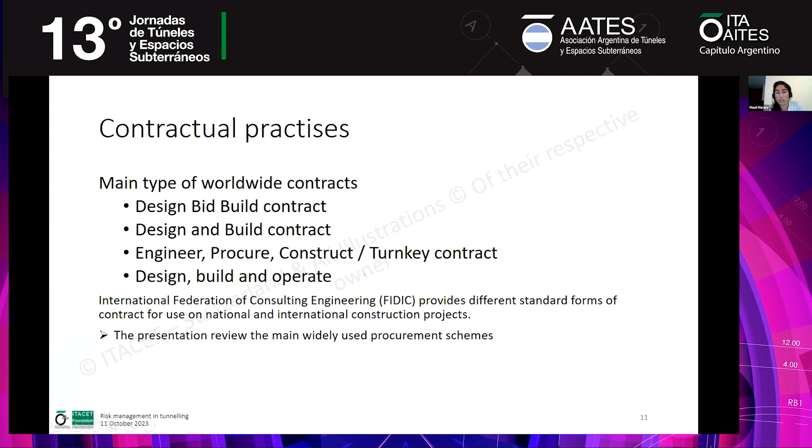So the first difference we can see is that the different types of contracts are not at the same level of design before. Sorry, I'm losing my English. So depending on the type of contract, you need to go further in the detail, in the design, before signing your contract.

So this one, the design-bid-build contract, is a contract where most of the design is, well, the employer takes the responsibility of all the design. He usually relies on a designer team, which is engineers, but he bears the responsibility of it. And then the contractor only does the work. Usually the owner takes back the operation.

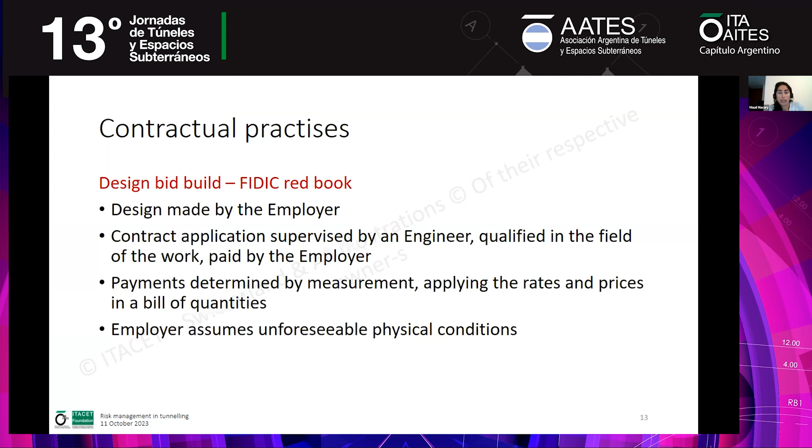Here, just an example of a project done under this type of contract. It's a part in Switzerland and France, done for the research field—it's an installation for scientific purposes. The object of the work was to extend all the logistical parts to install more scientific instruments.

So, the design and build contract. As I said, the detailed design is made by the contractor. There is still usually an engineer to supervise the work, and it's usually paid on a lump sum basis. The employer assumes unforeseeable physical conditions. So it's usually paid on a lump sum basis, but with some clauses to allow extra remuneration.

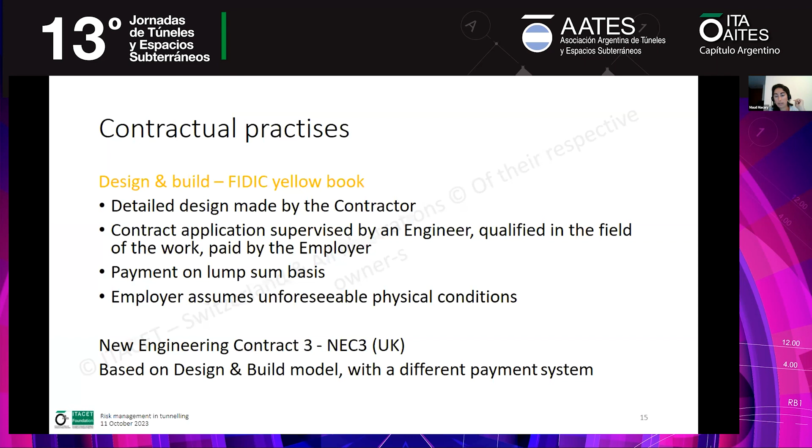This type of contract is also the base for what we call New Engineering Contracts, used in the UK—a contract based on the design and build model, but with another type of payment system. Here's an example of a project built with the NEC3 contract: the Lee Tunnel, a storm water and sewage collection system in London, built between 2010 and 2016.

What we need to bear in mind for these three types of contracts is that they share a risk between the employer and the constructor. In this case, the employer signs a contract at maybe a lower price, but may have further costs when particular unusual risks actually happen. The advantage is that the contractor avoids pricing such risks, which are not easy to evaluate.

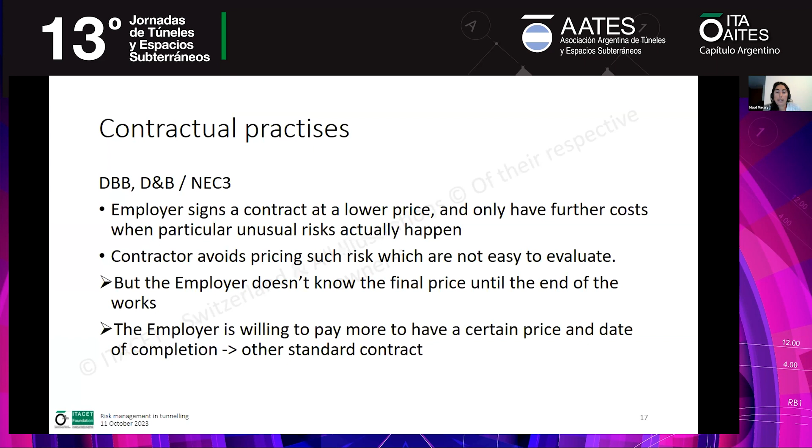The disadvantage of this contract is that the employer finally doesn't know the final price until the end of the works. So in this case, the employer may be willing to pay more, but to have a certain price and date of completion. In that case, he needs to use another type of contract, which is the turnkey contract.

In this case, the design is mainly made by the contractor, based on what the employer gives: the principle and basic functional basis—only the objectives and functional requirements. In this type of contract, there is no engineer to supervise the work, so there is only limited control by the employer, and the payment is on a lump sum basis—only lump sum.

In this contract, it is the contractor who is supposed to assume unforeseeable difficulties. So it may be a really nice contract. You have a fixed price and a secure date of commissioning when you sign it.

But actually, this is an example that was not really a lucky project. It was used for underground works for the first Gotthard rail tunnel.

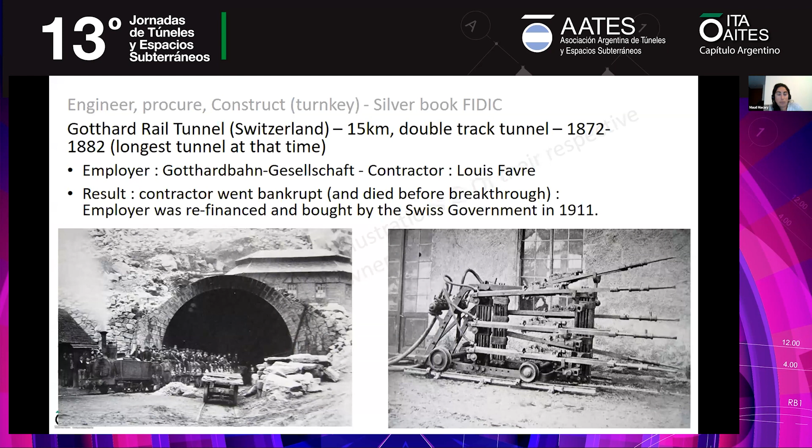The contractor went bankrupt, and finally the employer was obliged to refinance through the Swiss government.

This type of contract is really not suitable if there is no sufficient time or information at the tender stage to scrutinize and check the employer requirements, and it's not at all suitable if the construction involves substantial underground work.

As we see in all the presentations before, underground works always involve uncertainties, so a turnkey contract is definitely not a good idea for underground works. There is really no recommendation to use this standard.

I'll go quite quickly here. The design, build, and operate model is usually when the employer...

The idea of this type of contract is basically to have indirect financing, so it's usually the contractor who pays the cost of investment.

The contractor is then refunded through toll or rent. So this is a model of concession or public-private partnership.

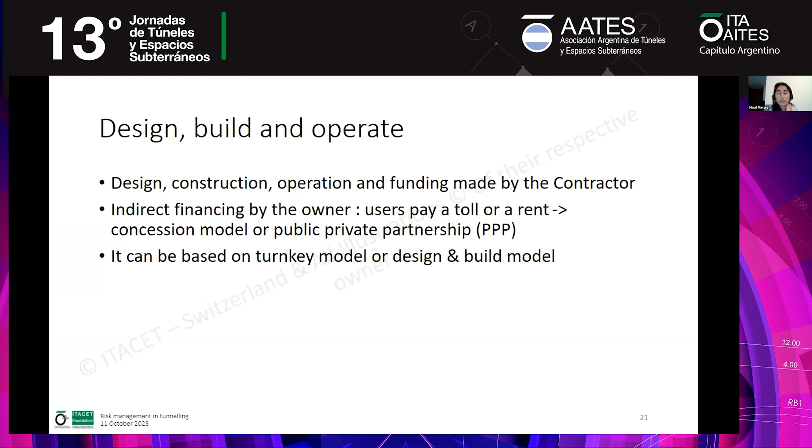Here is an example of a project which uses this type of contract: the Port of Miami tunnel, which was a 35-year concession.

What is really important to keep in mind is that the choice of contract needs to be strongly adapted to the level of risk of your project.

In the first case, you also adapt the payment tool, or the way you pay for the work, regarding the level of risk of the project.

In the first model, if payment is based on unit price, it allows you to adjust the payment, so you are able to deal with uncertainties and adapt.

If you need to adapt the quantities, then the employer is able to pay. In the design and build model, as I was saying, payment is usually based on lump sum plus what we call a differing site condition clause.

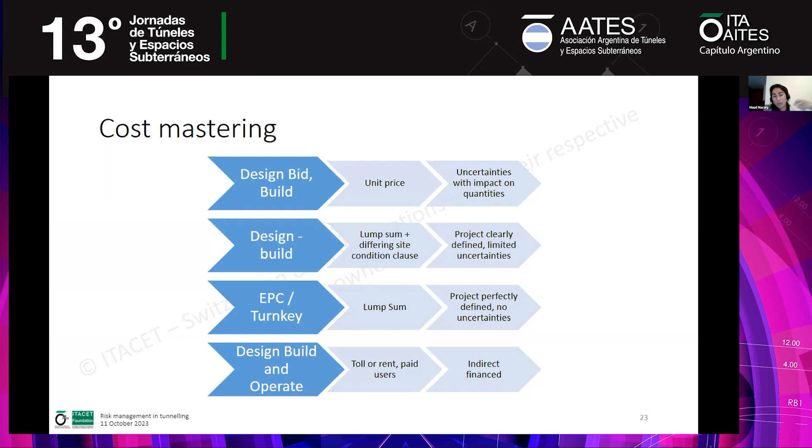The last one is useful if you don't have the money to invest and pay for the construction cost, and you prefer to have an indirect finance project, even though it may be more expensive because you pay the cost of the money.

So let's talk about work specificity, which is the main point we've seen in all the presentations before: it's all about uncertainties.

This is definitely the specificity of underground works: you always require excavation in an unknown or partly unknown environment.

And so your contract needs to deal with these uncertainties.

Another characteristic is that underground works usually require many workers, and also usually require a high investment in specialized equipment.

As we've seen before, for example, if you use mechanized methods of excavation with a TBM, the contractor needs to buy the TBM, which is quite a high investment cost at the very beginning of the project.

The key point is that team and equipment mobilization time strongly depends on subsurface physical conditions.

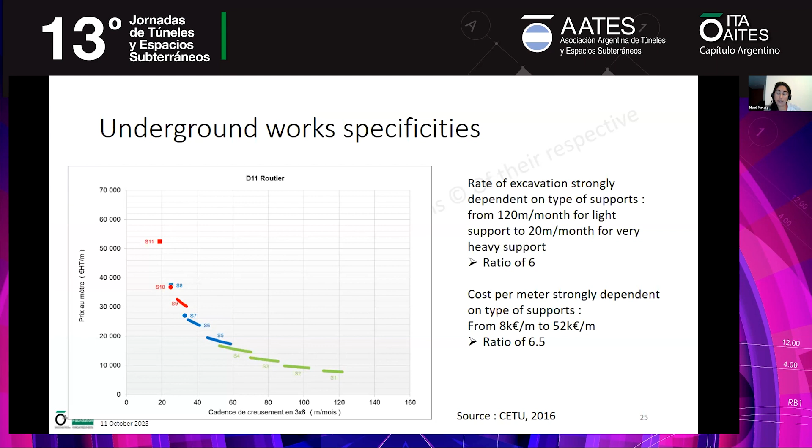This also underlines why it is really important to invest in ground investigation, because you definitely want to know which case you're mainly in regarding the underground geotechnical conditions. This is really the key point to bear in mind - the spread of the cost regarding the geotechnical condition.

This led to recommendations made by every tunnel association, mainly the ITA recommendation presented before by Elena. It's recommended that the employer be transparent about the data related to subsurface condition, and give all the information they have. It's really important in the contract to have an interpretation of the subsurface condition data, and baseline values that set the allocation of risk related to subsurface condition.

We've talked a lot about baseline values in the presentation before, and it's really important to have that in your contract. If you encounter conditions described in the geological baseline reports, the contractor should deal with this condition. But if you are outside of this condition, it is the responsibility of the employer to pay for the extra cost that may derive from these different subsurface conditions.

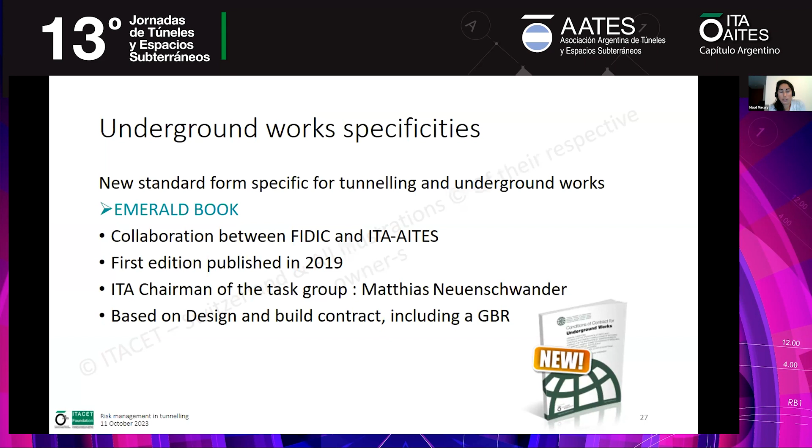This standard form of contract really takes into account underground work specificities and provides specific tools to deal mainly with uncertainties. I think the most important key point of this type of contract is to have a really clear risk allocation between the employer and the contractor - a fair risk allocation.

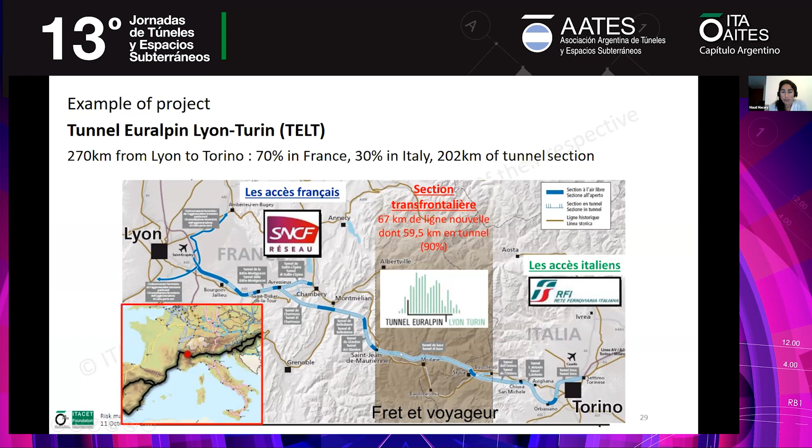Here's an example of a project that used a contract - not the Emerald book, but really close to it. This is TELT, a project between France and Italy, an international railway tunnel. Just to give you the concept of the tunnel with some pictures - Professor Peila had shown some as well.